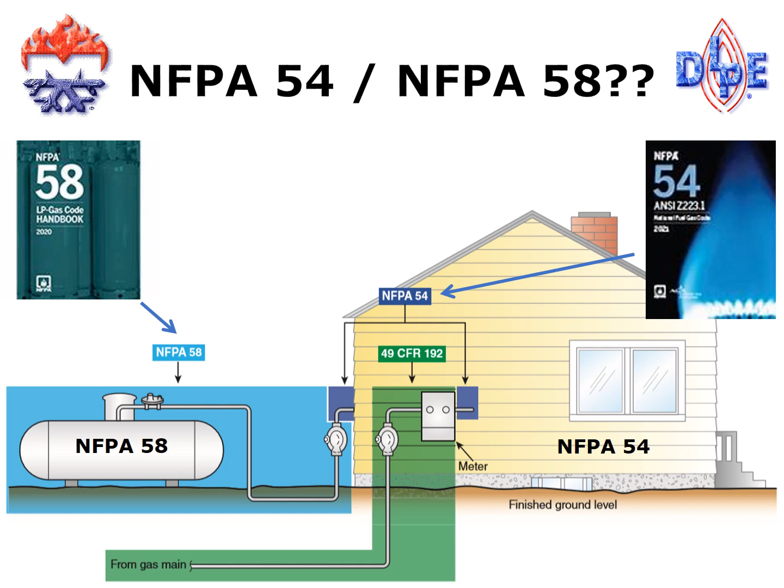It is highly recommended that anyone sizing LP gas installations not only have a RegO L545 LP gas serviceman's manual, but also download the free RegO app on their smartphone. In that RegO app is a copy of the L545 Blue Book, in PDF version. In addition to that, there are regulator sizing calculators and also line sizing calculators.

Quality Steel has a valuable app as well and will help you to calculate vaporization capacities. It gives you container sizing and much more important information.

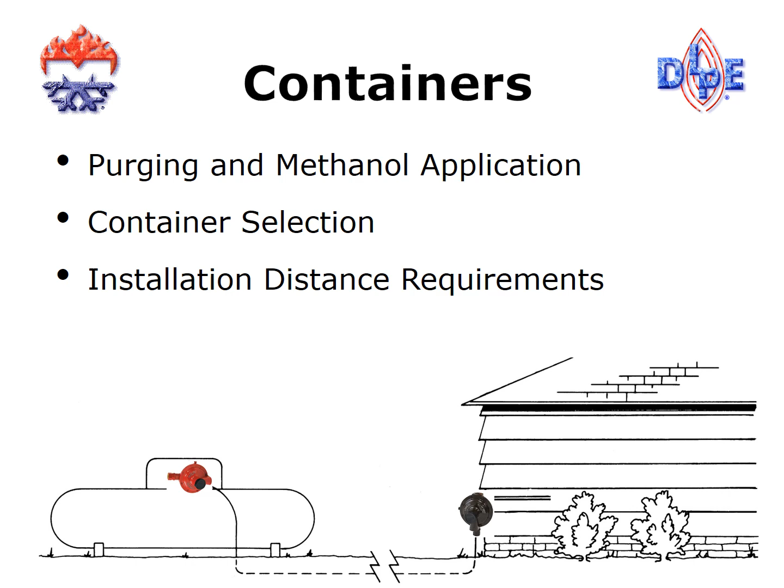Today we will be discussing container purging and methanol application, container selection, and also some installation distance requirement information.

A big part of making sure that we have a successful and efficient propane installation is to make sure that the containers are prepared properly before they're installed. A critical part of that preparation includes purging the containers, or making sure that all of the impurities like nitrogen or air or any sort of inert material are removed from the cylinder or the tank and replaced with propane vapor.

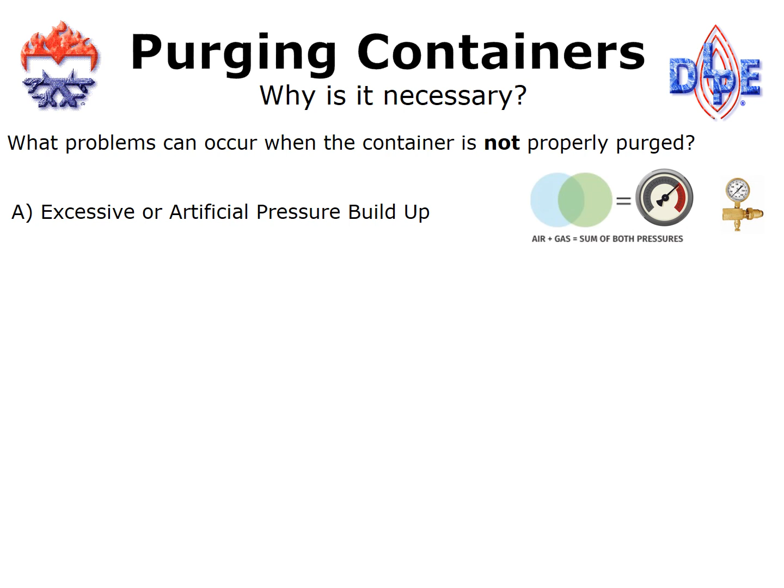This critical part of preparing that tank or those tanks will eliminate any excessive or artificial pressure buildup inside the tank. It will also make sure that we have the correct air and gas mixture to all of the appliances. Additionally, it'll prevent any containers from being filled slowly—it'll speed up that delivery process.

Because of the lower pressure inside the container, it will also reduce the potential for any tanks connected to the contaminated cylinder from being contaminated or affected by transferring that product from one container to the other.

It's important to point out that while we're talking about the importance of purging containers—getting all of those impurities or contaminants out—that most all new containers, and even containers that have been professionally recertified or refurbished, are shipped from the facility that they were built or repaired.

They're shipped with a vacuum purge already on them. So many of the steps we're going to be talking about over the next few slides do not pertain necessarily to new containers. However, there is a chance, and we'll get into this a little bit later in the presentation, that even those newer tanks will lose that vacuum purge over time, whether it's through shipping or whatever. So the ability to repurge that container, the ability to know how to do that, is very important.

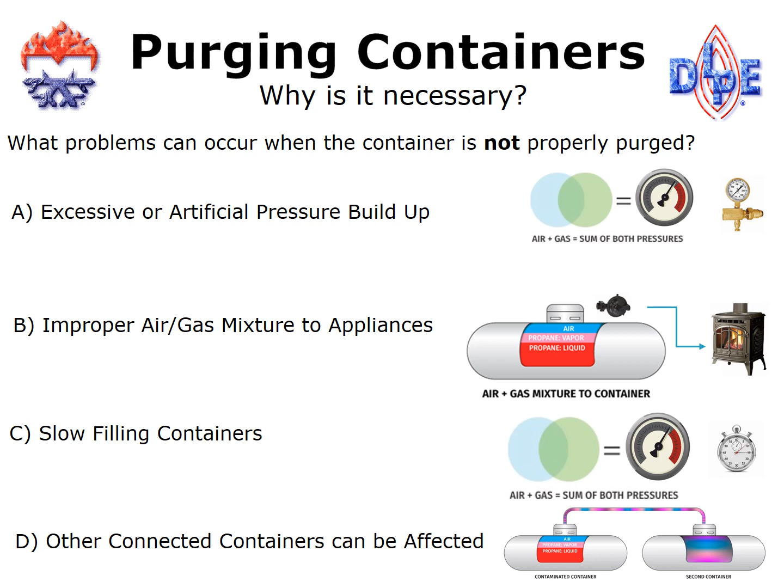I mentioned excessive pressure buildup can occur. Well, consider the fact that propane on any given day, depending on the outdoor temperature, can be at a varying pressure. The warmer it is outside, the higher the pressure is inside the container.

For example, on a 100-degree day, the approximate vapor pressure inside of that container is almost 200 pounds. Well, if you consider the fact that atmosphere, or air at atmospheric pressure, is nearly 15 pounds, it's easy to see that combining those two pressures—atmosphere and also whatever the pressure of the propane itself is inside the container—can result in an unsafe working pressure.

It's also important to make sure that we have all of the air or inert gas out of that container before propane is introduced into it, because we want to make sure that we have a proper air mixture to all of the appliances. Propane appliances are designed and built at the factory to mix the air in with the propane vapor at the actual burner tip or point of combustion. So if we provide that appliance with a product that already has air in it, it will result in a burner flame or burner tip lifting or becoming too lean to burn properly.

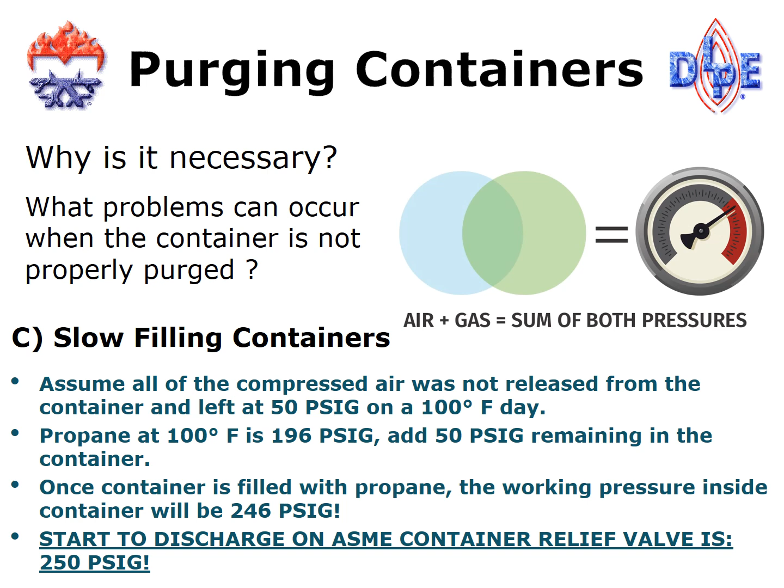And of course, when we have a multiple container installation and one of those containers was not properly purged and possibly has some impurities in it, when those containers are connected together, those impurities will transfer or migrate from one tank to the other, which will now create a situation where we have multiple tanks that are improperly purged.

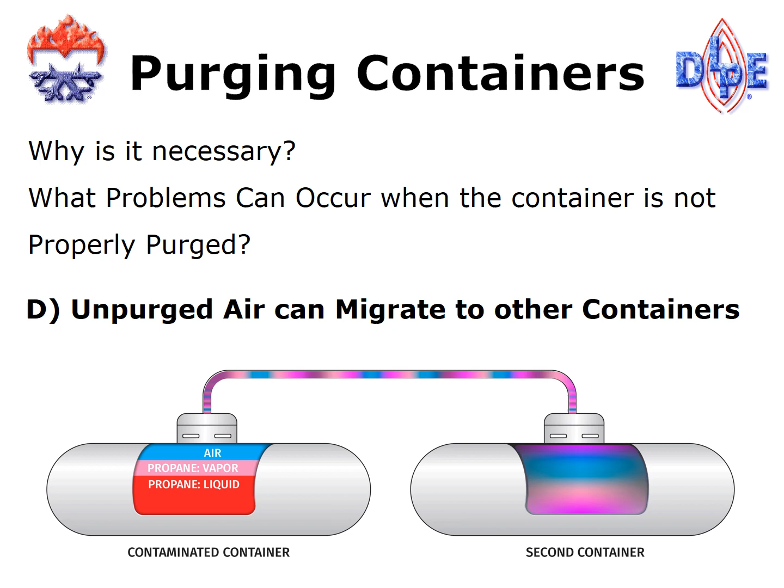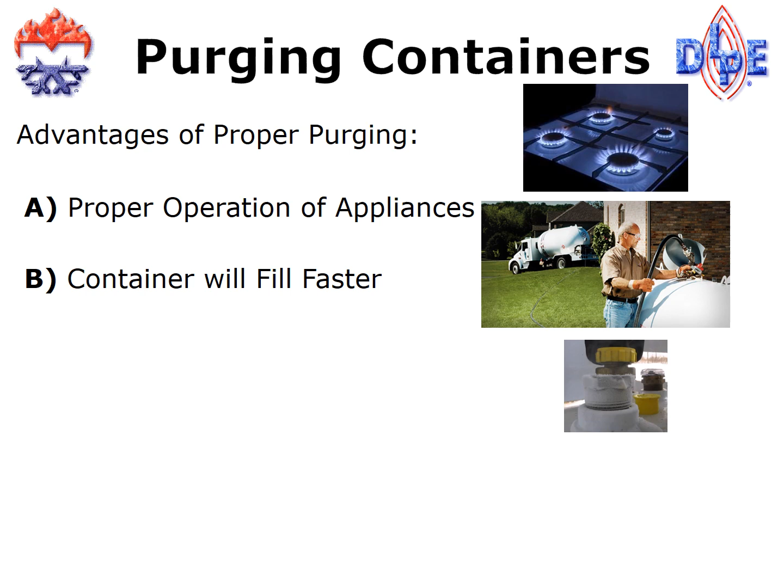So just like that, with the proper purging of propane containers, you'll make sure that the appliances are operating properly. You'll make sure that the containers are filling faster. You'll reduce the risk of a premature pressure relief valve discharge. And you'll also eliminate the transfer of air or impurities from one container to the other. And once this system is running efficiently and at peak performance, you're going to have happy customers as well.

If a container's been open to atmosphere, there's a high likelihood that some impurities have entered the cylinder or tank. Sometimes what happens is a cylinder will be left open. It will allow atmospheric pressure to enter inside the container, and then either the cylinder is simply left open, or someone realizes the tank has been left open and turns it off.

In those cases, sometimes the pressure will actually build back up. The point is, if a cylinder or tank has been open to the atmosphere for any length of time, it's important to release the contaminated product inside the container to atmosphere and then begin a conventional purging process. Always make sure that any release of impurities or propane into the atmosphere is done in a safe, controlled manner in an approved location, such as a bulk plant or other approved location for this process.

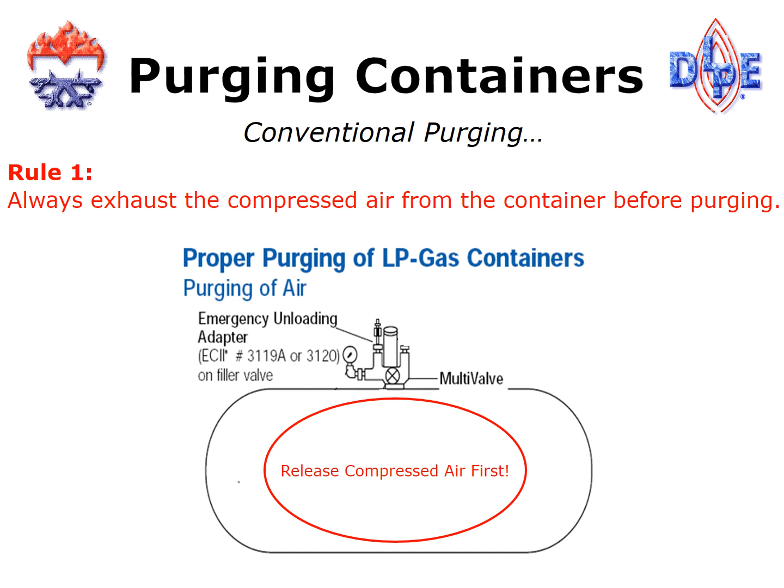It's important that when we perform a conventional container purge, we always use propane vapor. We never want to use liquid propane. When liquid propane is used, as little as 50% of the air will be removed from a container during the process.

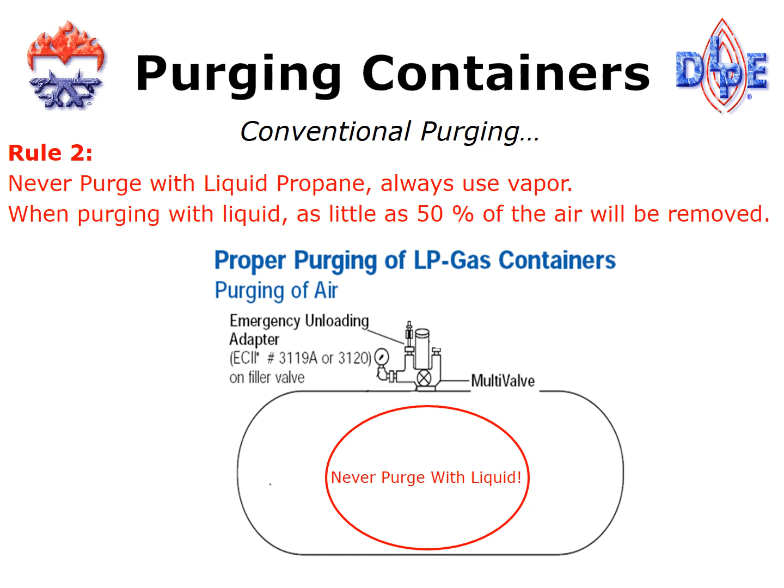The purging process is pretty straightforward. Again, using only propane vapor, we want to introduce approximately 15 psi into the container approximately 4 to 5 times. In other words, we want to introduce the 15 psi, which basically is equal to 1 atmosphere, and we want to do that again 4 to 5 times. Each time we do this, we want to exhaust that 15 psi out into the atmosphere before the second 15 psi is introduced into the container.

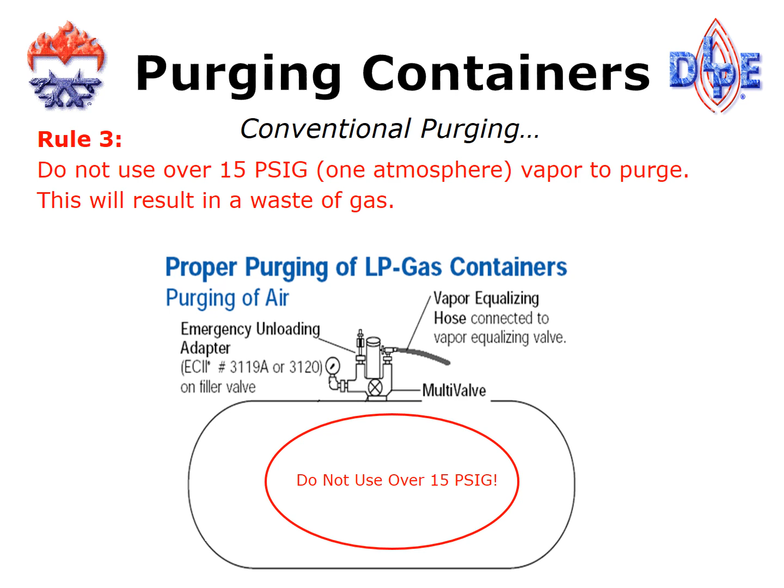Probably the best way to do this is with an unloading adapter. We would take the unloading adapter and install it on the filler valve to open up the back check. Then we would take a 0 to 300 pound pressure gauge and install it through the POL connection on the service valve or multi-valve. Third, we would attach a vapor line to the container and pressurize the container from another source up to 15 psi, which again equals 1 atmosphere. The vapor would be introduced into the container through the 1.25 inch Acme connection on the vapor equalization connection.

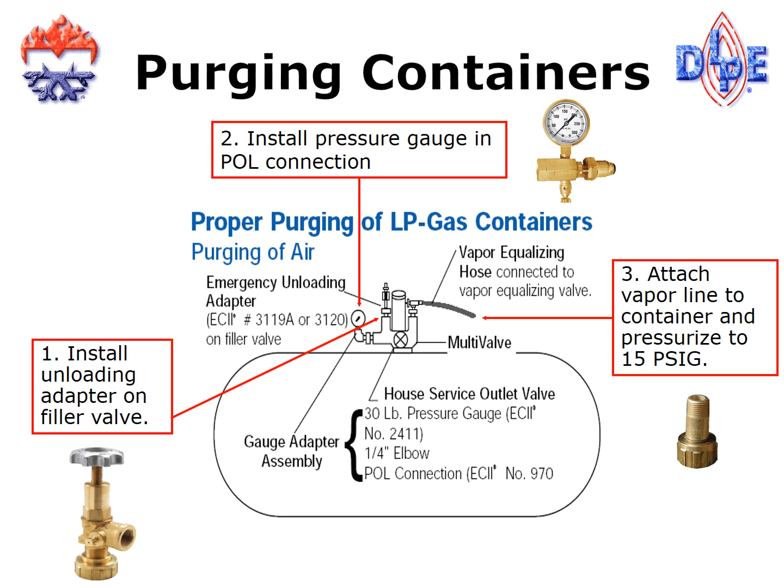The next step would be to close the vapor inlet hose on the vapor equalization valve, then vent the air and gas mixture to the atmosphere. And again, remember, this is something we're going to be doing 4 to 5 times. Incidentally, the product will be released to the atmosphere through the unloading adapter connection at the fill valve.

After this procedure is done 4 to 5 times, the remaining or residual air left in the container is somewhere between 3 and 6%.

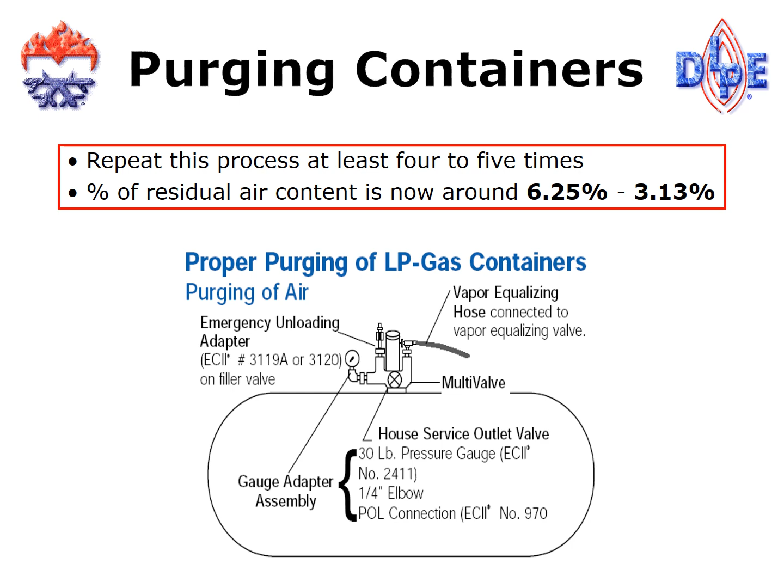Here's basically what happens when a conventional purge is done. After the first 15 psi purge, approximately 50% of the product remaining in the container is air. After the fourth introduction of 15 psi vapor, approximately 6% of the remaining product in the container is air. If you look at the chart on page 12 of the RegO Blue Book, the L545, you'll see that every time a purge is done, it cuts the remaining air inside the container down by approximately half. The first purge left 50% air remaining, the second left 25%, the third left 12.5%, and so on.

Another thing to point out is how much product is used. Again, this is generally more of an old school method to purge tanks, but there are some instances, even today, where this is required. If a 1,000-gallon tank is purged properly, it'll consume approximately 18 gallons of propane to get that container properly purged.

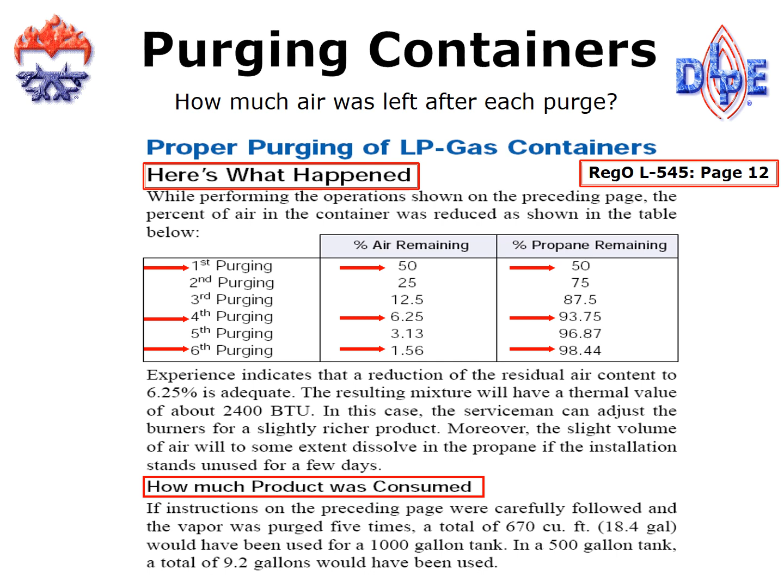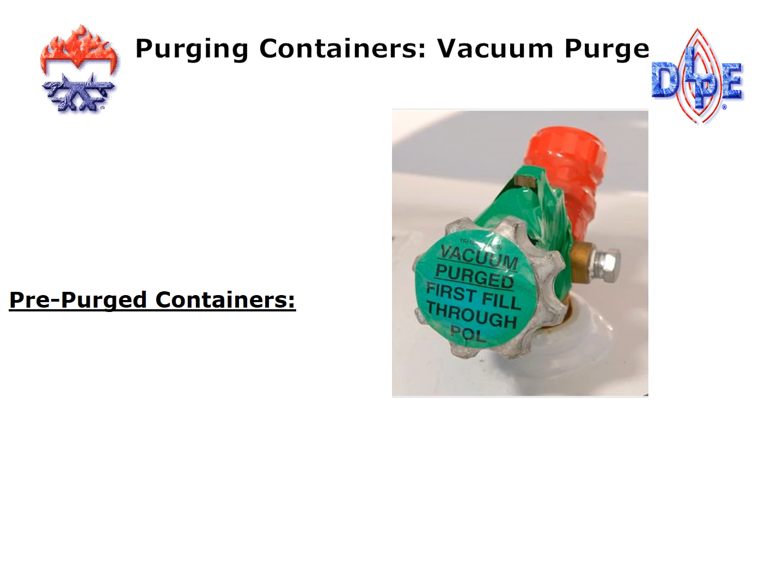As I mentioned earlier, modern tanks all come from the factory with a negative pressure or vacuum purge on them. They're all considered pre-purged containers from the manufacturer. A vacuum pump is used to draw down or reduce the atmospheric pressure inside the container from 1 atmosphere, about 15 psi, to minus 27 inches of mercury. Another thing I mentioned earlier was to never remove the shrink wrap or the decals from any of the fittings on a vacuum purged container.

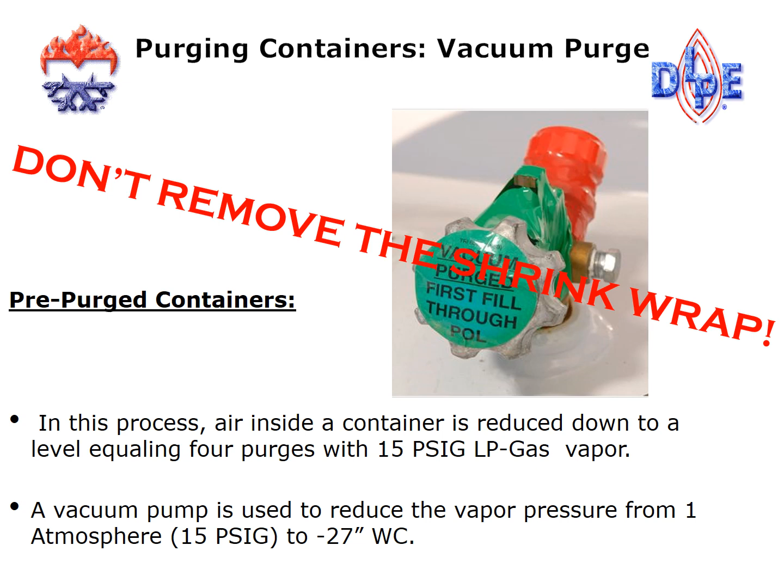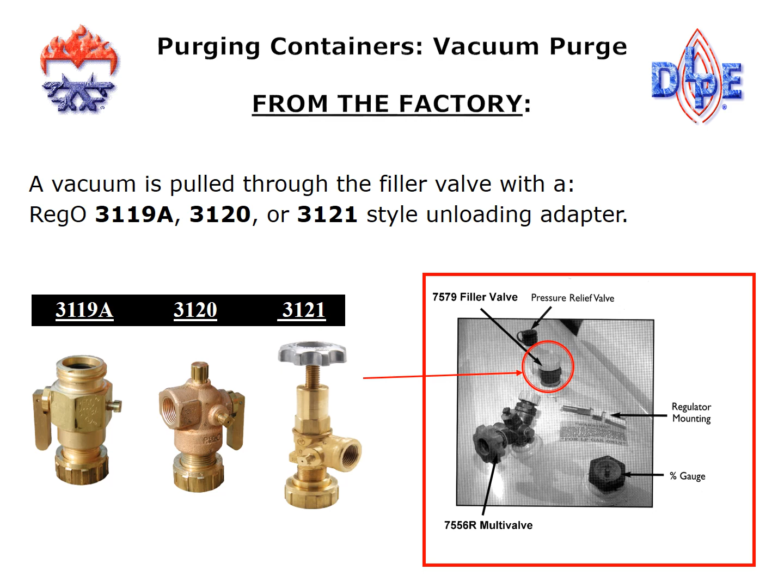It's a pretty simple process. The manufacturer pulls a vacuum on the container by putting an unloading adapter on the fill valve. Approximately halfway through drawing the vacuum or initializing the purge on that tank, the valve is shut off, the fill adapter is removed from the fill valve, and the remaining portion of the vacuum or drawdown is pulled through the POL connection on the multivalve.

This is done because if all of the vacuum was pulled through the fill valve, the issue would be upon removing the fill valve adapter from the fill valve. If the negative vapor pressure on the container were at full capacity, minus 27 inches water column, both checks inside the fill valve would be drawn open to pull atmosphere into the container, which is what we're trying to avoid. By pulling half down through the fill valve, we're doing it in an efficient manner and then finishing up that vacuum purge through the POL connection. Doing so will allow us to control with the service valve how much product passes into or out of that valve.

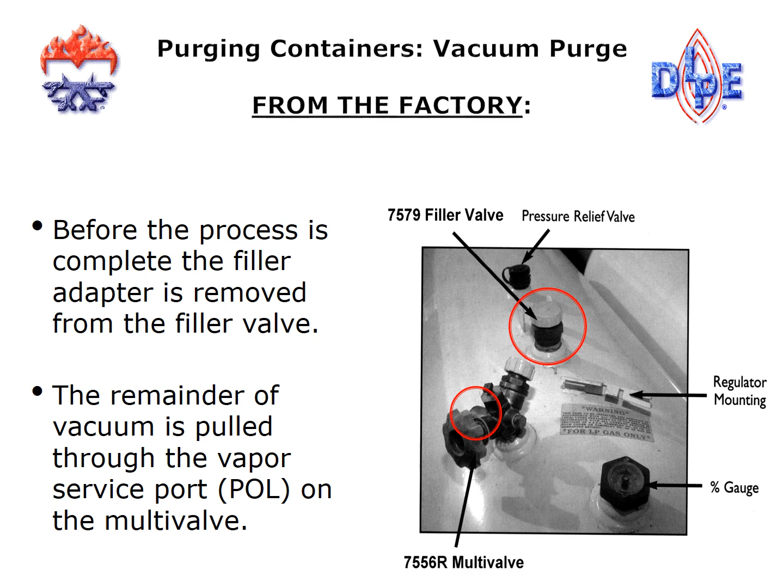With most all new containers being shipped from the manufacturer with a vacuum purge on them, and also reconditioned or refurbished containers being shipped from the refurbishing facility with vacuum purges on them, it's important to point out the 3 basic steps or rules that we suggest be followed to make sure that vacuum is not lost before placing those containers into service.

When receiving pre-purged containers, rule number 1 would be to carefully remove the plastic shrink wrap and any stickers or decals placed on the fill valve and also the multivalve from the factory. Additionally, the 1¼ Acme cap and the 3/4 Acme cap must remain tight and not be removed. The service valve and the spitter valve also must remain tight and not be opened up. Failing to do any of these steps may result in the vacuum purge on the container being lost.

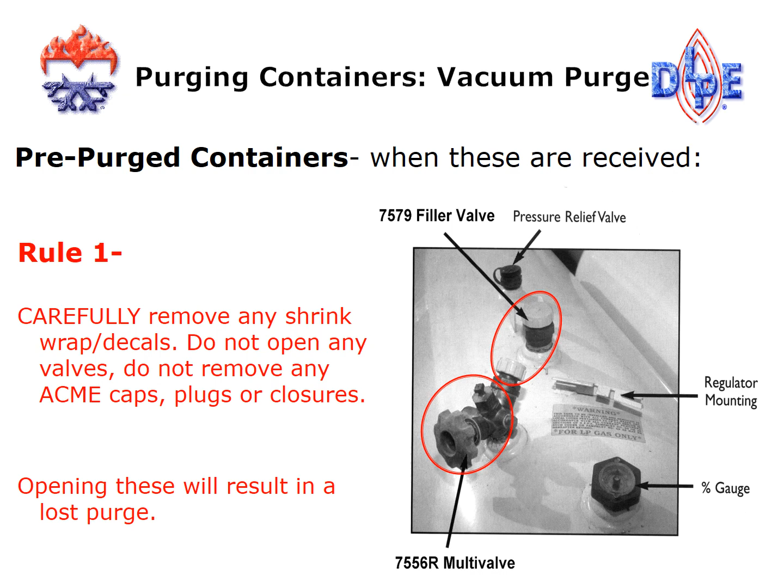So what happens if a vacuum purge container is received, but it's lost its vacuum, lost its purge? Well, in that case, that tank or container must be purged the conventional way. Basically, this means introducing 15 psi of propane vapor into the container and then releasing it into the atmosphere. This is required to be done 4 to 5 times to remove any residual impurities or air from the container and place it into the atmosphere.

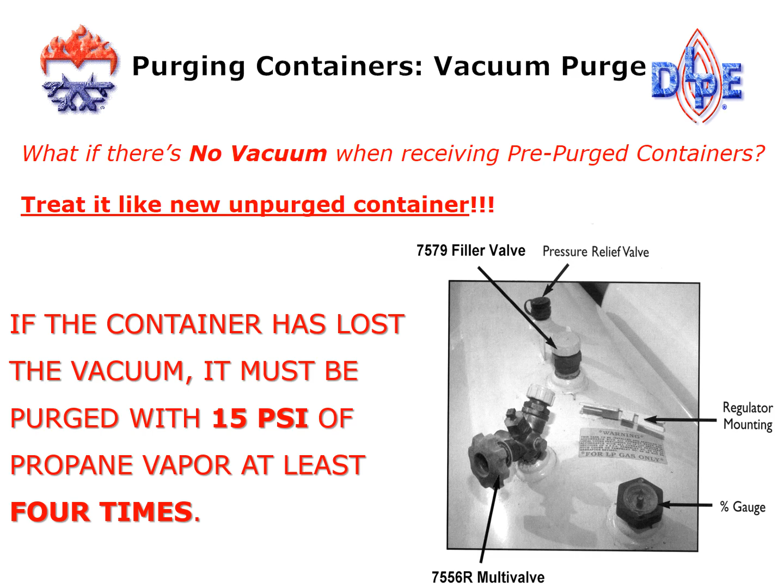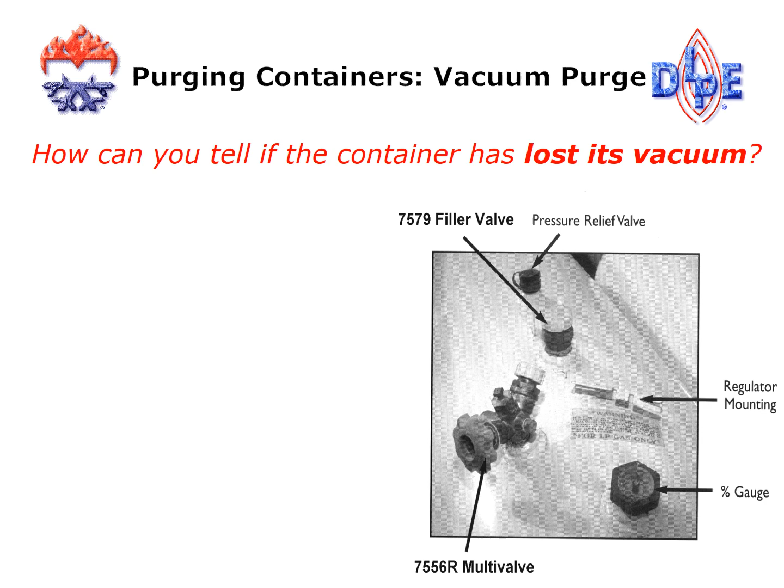It's often asked, how can you tell if the container has lost its vacuum purge? Well, you can tell because at the beginning of the next step, which is rule 2, it's required to introduce methanol into the container. We do that by using the vacuum on the tank to draw that methanol in to treat the inside of that tank properly for moisture. If the container does not draw the methanol into it, using the method we're going to speak about in a few moments, then that's a good indication that container has lost its vacuum purge.

It's important to point out that the number of containers that lose their vacuum purge between the time they leave the manufacturing facility and the time they're prepared for service, prepared to go out into the field, is very small. But it's worth noting what the proper procedures would be if that does take place.

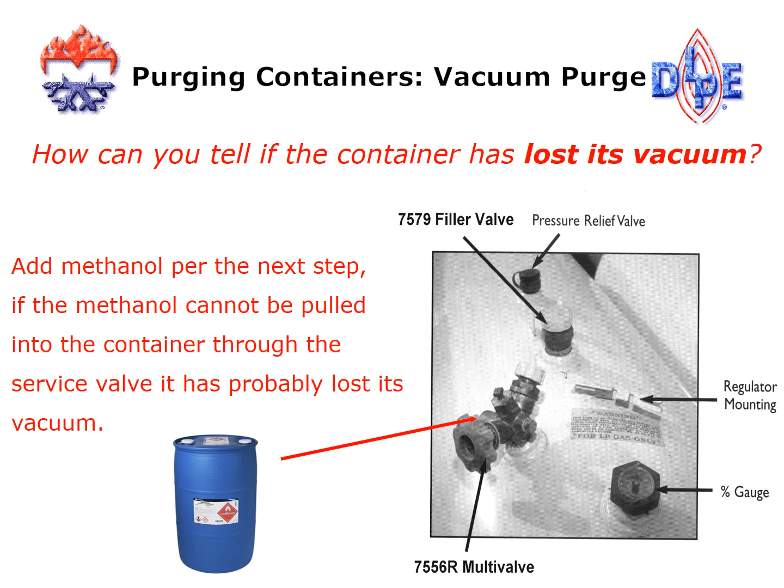Rule number 2 is to begin to introduce methanol into the container. On page 9 of the RegO L545, or that little blue book, it will detail how much methanol is required to be drawn into or injected into a container of a particular size.

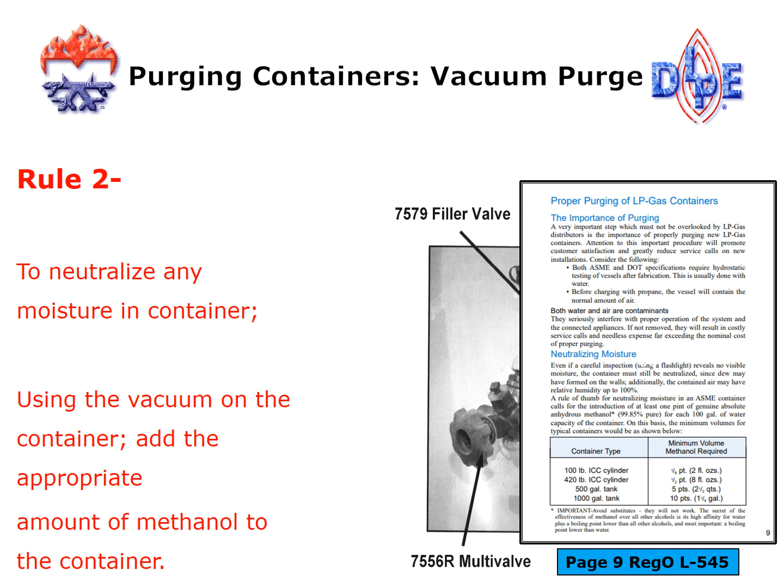If a container has a vacuum purge on it from the manufacturer, a measuring cup is filled with the appropriate amount of methanol. A rubber pigtail is connected to the POL connection on the multivalve and placed into the measuring cup. Then the service valve is opened very slightly, which will draw the methanol in the measuring cup into the container. It is important to make sure that service valve is turned off before drawing any atmosphere or surrounding air back into the cylinder or container.

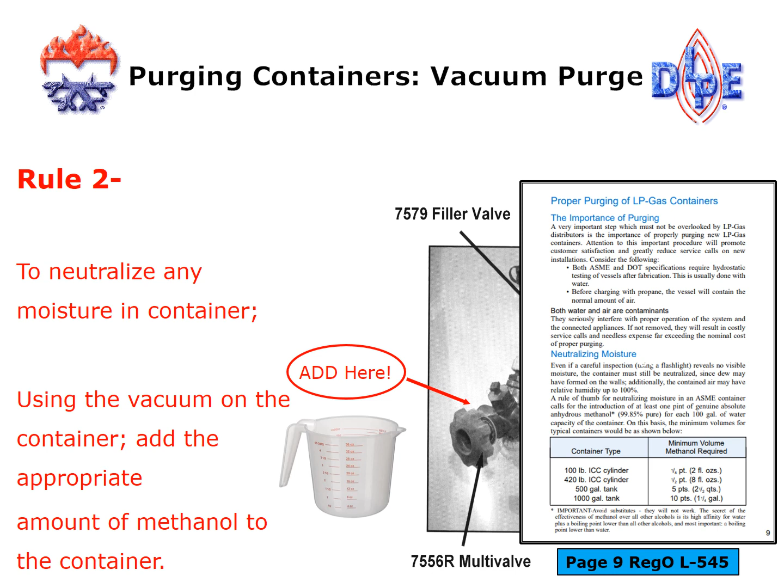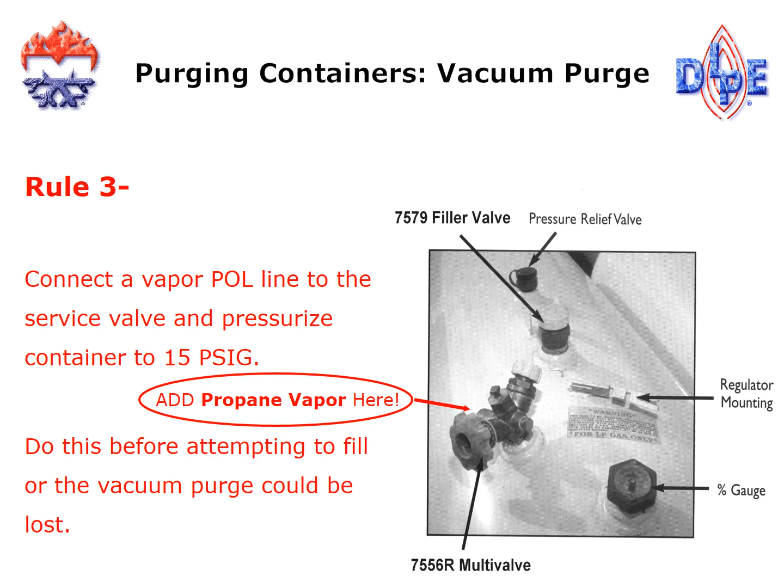Two reasons why it's so important to introduce methanol into a new container: over time, if water or moisture remains inside or on the inside walls of a container, it will lead to rust or oxides. It has been proven and well debated over several decades that rust or oxides may affect the strength of the ethyl mercaptan that's injected into the propane at the terminal. So we want to prevent odor fade or any potential causes of odor fade, to minimize the risk of rust or oxides being created inside the container.

Another reason it's so important to neutralize the moisture is because that water in a tank or container will be withdrawn with the vapor into the pigtail, into the inlet nozzle of the regulator, and at certain temperatures or certain BTU demands will cause the orifice built into the inlet nozzle to freeze over. And of course, when that orifice freezes over, it will essentially stop the flow of gas into the regulator.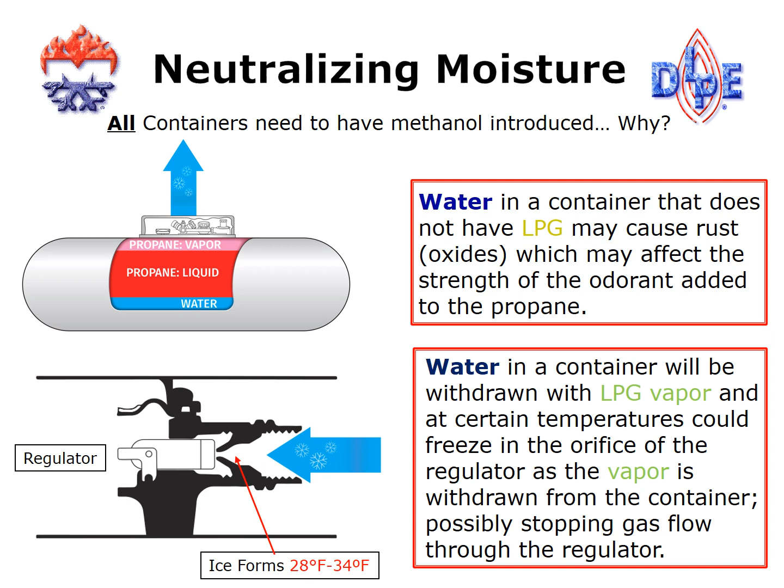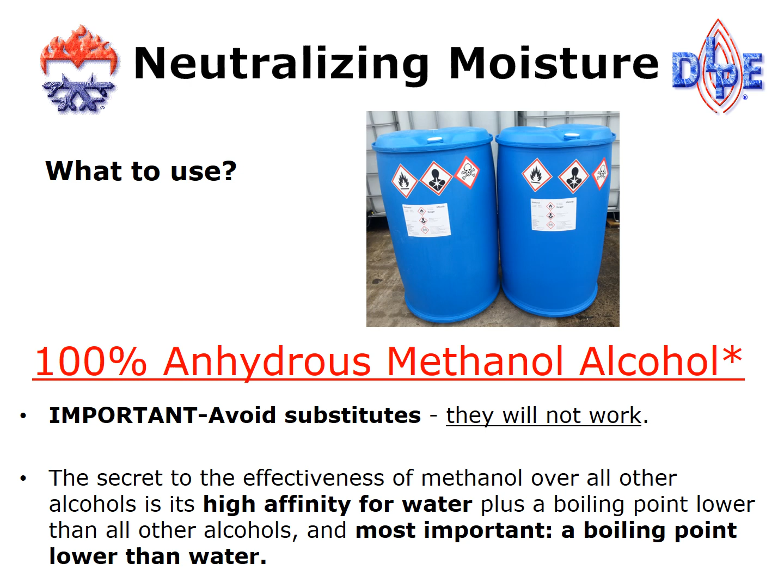Always make sure 100% anhydrous methanol alcohol is used when treating containers. This will work the absolute best. Again, on page 9 of the RegO L545, there is a chart showing the recommended amounts of methanol, or the minimum volume required for introduction into new containers, new tanks or cylinders.

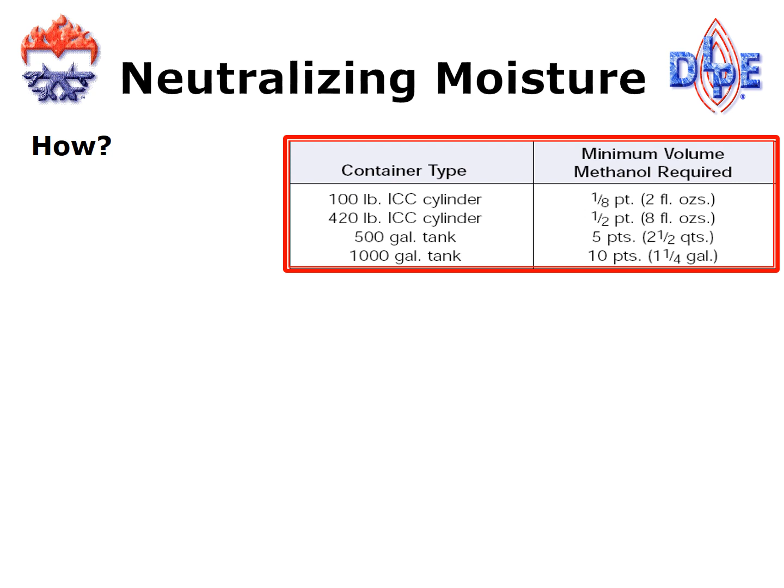What about treating a tank that's already in service? Maybe a tank at a customer's location showing signs of having moisture, but obviously has a positive pressure on it because it's been in service for a number of years. In those cases, you can use a methanol injector, which does basically the same thing as drawing the methanol in with a vacuum, but it forces liquid methanol into the tank with a hand pump through the POL connection on the service valve. Just another way to treat a container that's already in service.

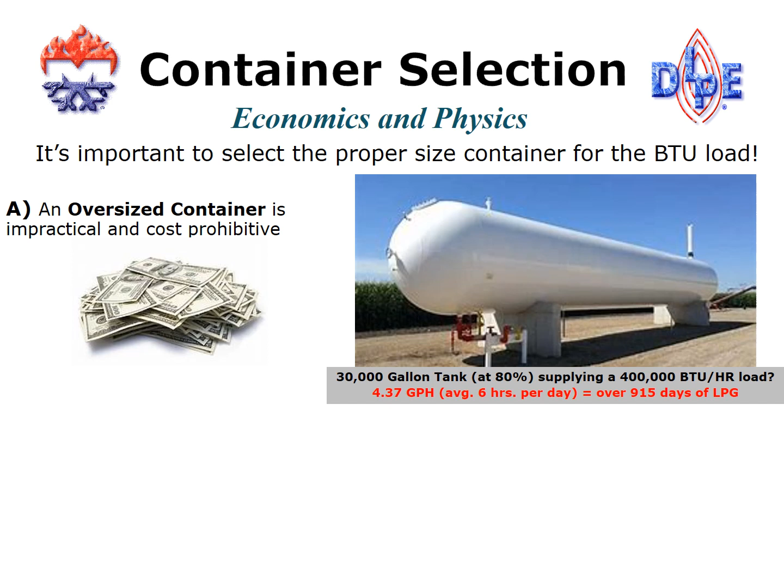Sizing a propane tank is very important. Oversizing a tank will not hurt or affect the performance, but it can be impractical and very costly to do so. Additionally, there may not be enough property or land available for a larger container to be placed on site.

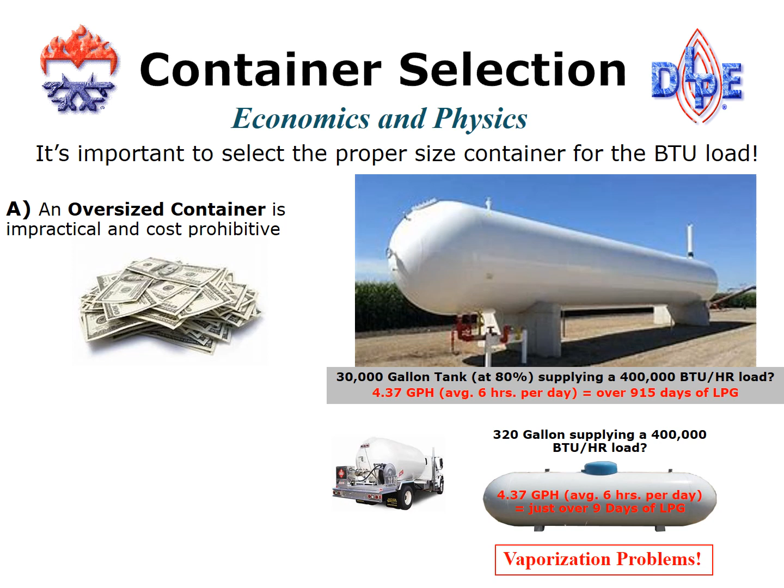The real problem, however, is when a tank is undersized. When you undersize a propane tank for an installation, there are a few things guaranteed. The first is increased delivery costs, because the number of times per year or per quarter that location needs to be topped off is increased. But the most important negative effect of undersizing a container is that it may not vaporize enough BTUs or enough product to support the installation. Going back to the wetted surface inside the tank, the smaller the tank, the less wetted surface where liquid propane touches the sidewalls, which will almost guarantee a vaporization problem.

Remember, the wetted surface, or the area where the liquid propane is touching the sides of the tank inside, will result in the tank's ability to efficiently vaporize that liquid. The more wetted surface, the better that tank will vaporize based on the BTU demand that's being placed on it.

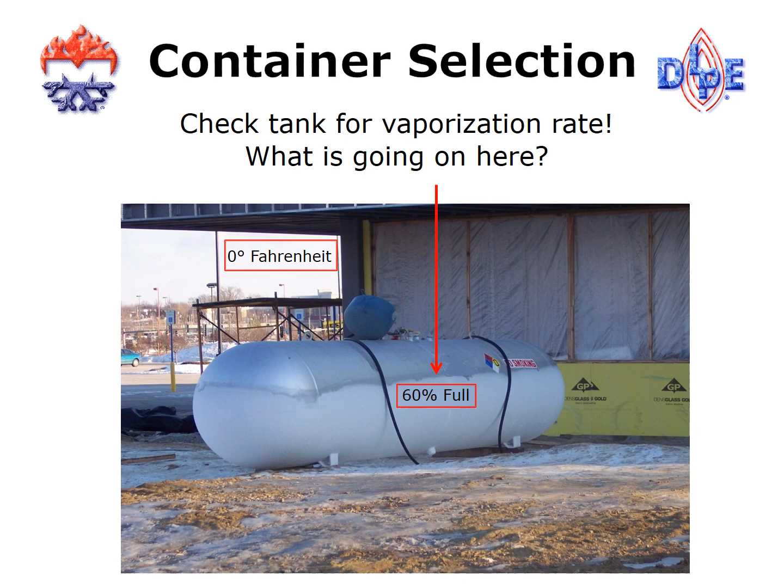Notice that the warmer the temperature is, and the more liquid volume inside the tank, the higher the BTU capacity or vaporization rate of that tank is. There's a direct relationship between the amount of liquid inside the tank, in other words wetted surface, and the outdoor or ambient temperature. The higher the temperature outdoors and the more liquid volume or wetted surface inside the container, the better performance a container will have.

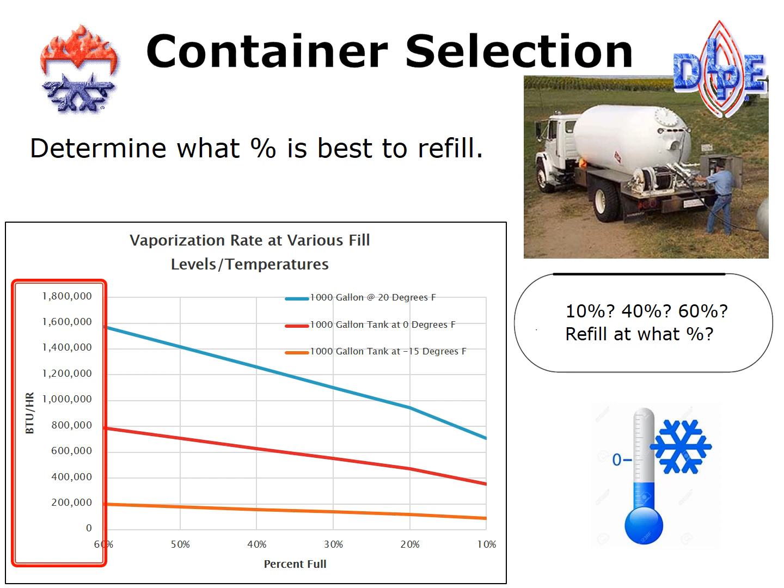Providers also need to determine what size tank is best. Maybe it's a 500 gallon tank, maybe it's a 1,000 gallon tank. Is the customer going to add appliances in the future? Is the tank location difficult to reach in the snow? Is there a bad driveway? All of these things come into play when determining what size tank to set for an installation.

Before we begin our vaporization or tank sizing exercise, I want to point out the three main ingredients to determining proper tank sizing. The first thing we have to figure out is how many BTUs, what is the maximum amount of BTUs this installation will require, and also take into consideration what future appliances the homeowner may decide to add.

Again, what percentage does the propane provider want to go to that location and refill that tank? It's inefficient to go when the tank is at 60 or 70%. But by the same token, you don't want to wait until the tank gets too low and risk that customer running out of product.

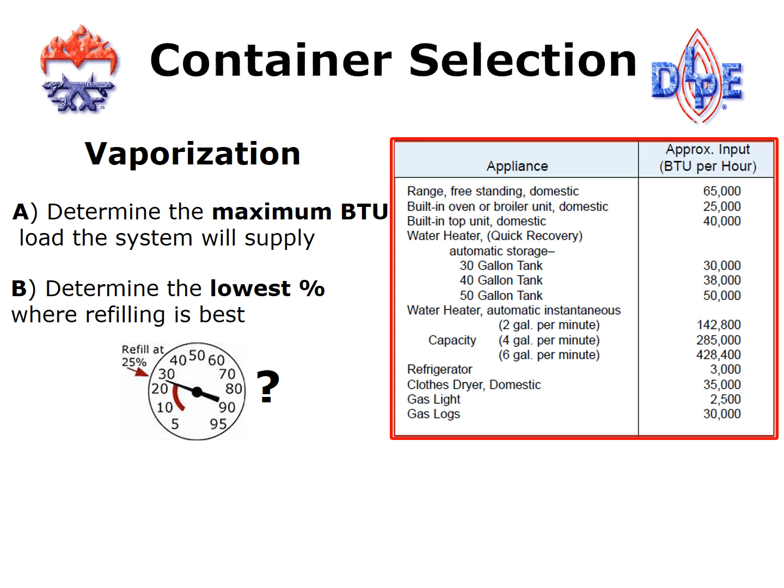The third step is to determine where this tank is located. Is it located in South Florida or is it located in Minnesota? The outdoor temperature, or the coldest outdoor temperature that tank or installation will be subjected to, will also play a large role in determining what size tank to put in or install at that location.

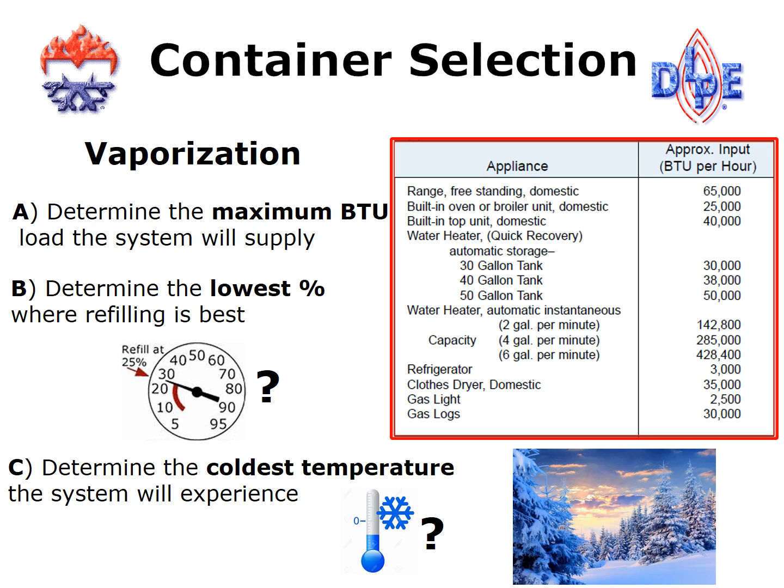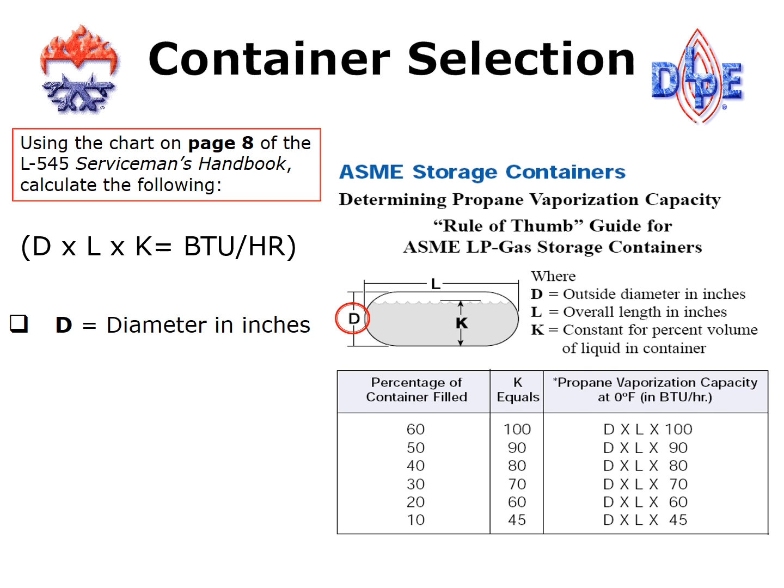So how do we size a large ASME storage container for an installation? It comes down to three measurements: the diameter listed as D, the length listed as L, and K, which is the lowest percentage of liquid that will be in that tank during normal operation.

That percentage would basically be a target before refill. In other words, a tank would not get below, say, 20% or 30%. Each percentage, if you look at that chart on the screen, which is on page 8 of the Rego L-545, shows a multiplier, or K, where it says K equals in the middle of the chart. K is basically representing a multiplier based on what that lowest percentage will be in that container.

Essentially, we're taking D, the diameter of the tank in inches, and L, the length of the tank in inches, and multiplying those two numbers by whatever K represents. In other words, at 20%, the multiplier would be 60. It's also important to point out that on all ASME containers, the diameter and the length in inches are listed on the data plate.

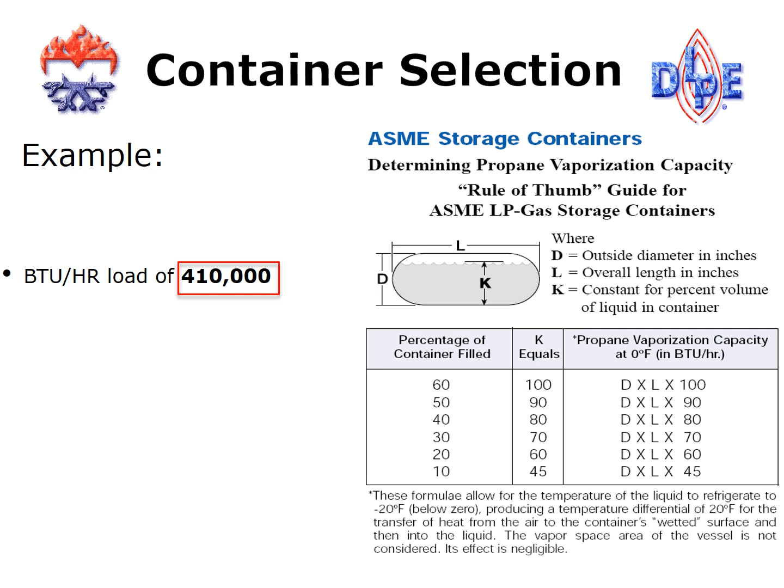Sizing an ASME propane container is pretty straightforward. Let's work through this one installation example. In this particular installation, we have a total BTU demand of 410,000. We have a propane provider that's decided to target refills at 20%, so that's the lowest this tank is anticipated to get. We're also in a region that experiences temperatures as low as 0 degrees Fahrenheit, our coldest expected winter temperature. So with all this information, what size container is required for this job?

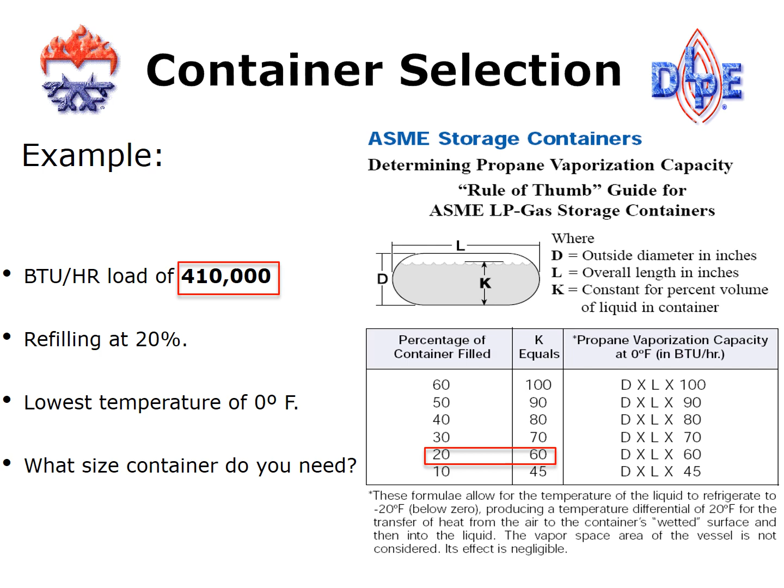The first tank we're going to try to size for this particular job is going to be a 500-gallon above-ground tank. By looking at the data plate, we know that a 500-gallon above-ground tank has a 37-inch diameter and an overall length of 119 inches.

So very simply, we take the diameter of 37 inches times the length of 119 inches times 60, which is, based on the chart, the multiplier for a 20% refill, or the lowest percentage that will ever be in that tank. If we multiply 37 by 119 by 60, we come up with 264,180 BTUs. So the question is, will one 500-gallon container work for this installation? The answer is no. Remember, our overall requirement is 410,000 BTUs, and that doesn't account for any potential future appliances being added to the system.

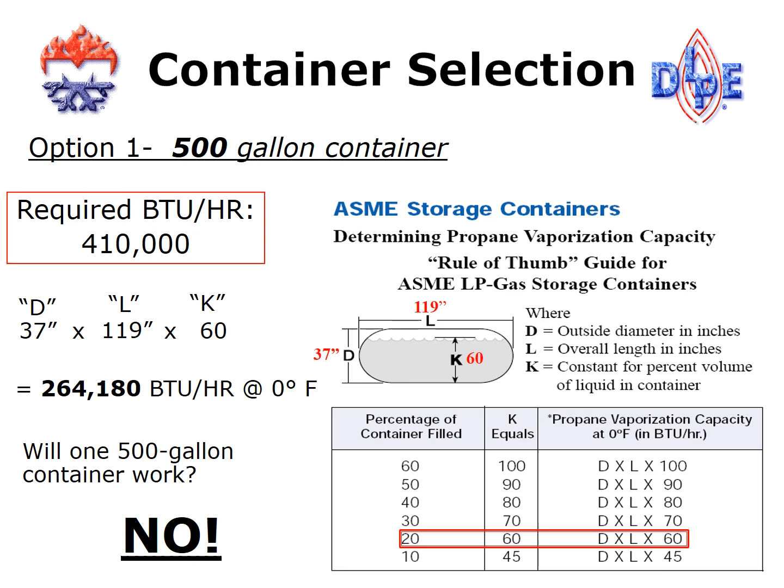So if a 500-gallon above-ground ASME tank won't work, let's try a 1,000-gallon above-ground tank. By looking at the data plate on a 1,000-gallon tank, it tells us that the overall diameter is 41 inches and the overall length is 192 inches. Now we take 41 inches times 192 inches times 60 for the multiplier of 20% as based on the chart, and we come up with 472,320 BTUs. So then the question becomes, will one 1,000-gallon tank work? The answer is yes. 472,000 BTUs exceeds the current BTU requirement.

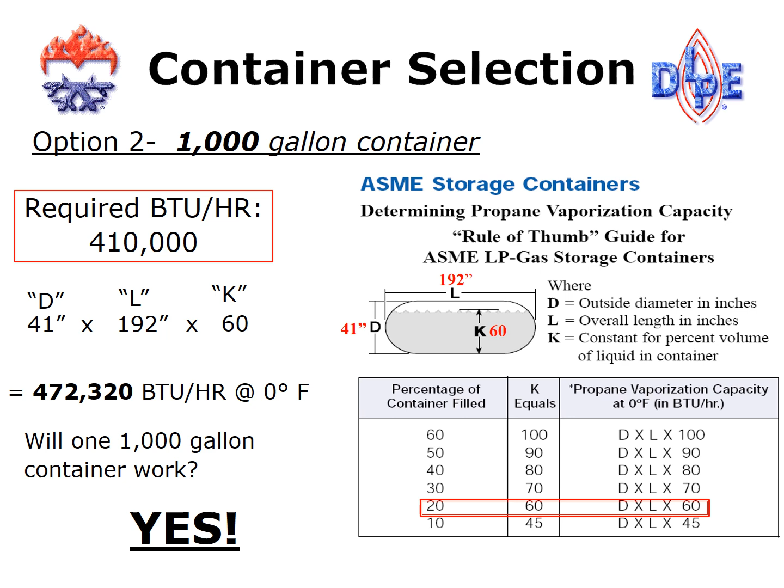As we all know, different parts of the country or different regions experience different coldest winter temperatures. So on page 8 of the Rego L-545, there are also multipliers listed. If the coldest winter temperature your region experiences is minus 15 degrees Fahrenheit, you take that overall calculation we just came up with in the previous slide and multiply it by 0.25, or take 25% of what that calculation was. The calculation we did on the previous slide and the one before that for both the 500 and 1,000-gallon tanks were based at a coldest winter temperature of 0 degrees Fahrenheit. If you're in a region that experiences the coldest temperature of 20 degrees, then you would multiply that overall number by 2.

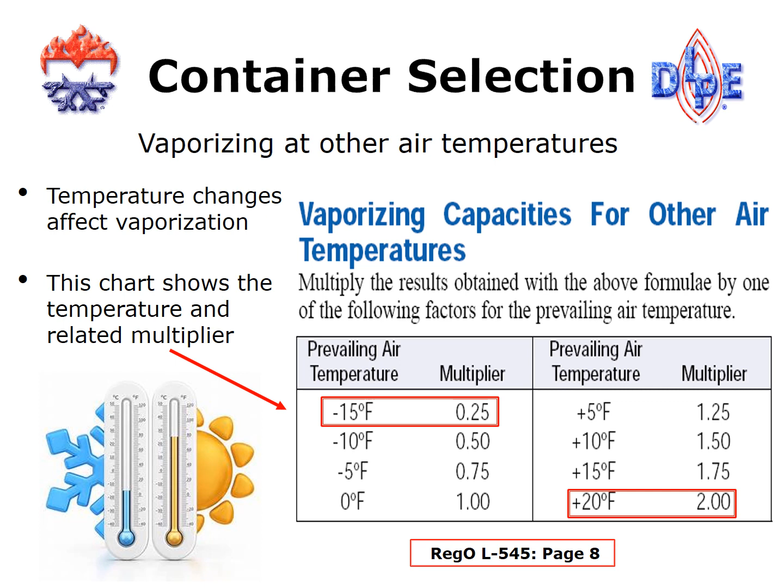To show just how important a role outdoor temperature plays on internal pressure and BTU capacity, here are some examples of the differences of the same 1,000-gallon tank at 20% full. This one example is of that tank at 0 degrees Fahrenheit. Similar to the calculation we just made, it's the same tank. The BTU capacity of this 1,000-gallon tank at 0 degrees, 20% full, is 472,320 BTUs.

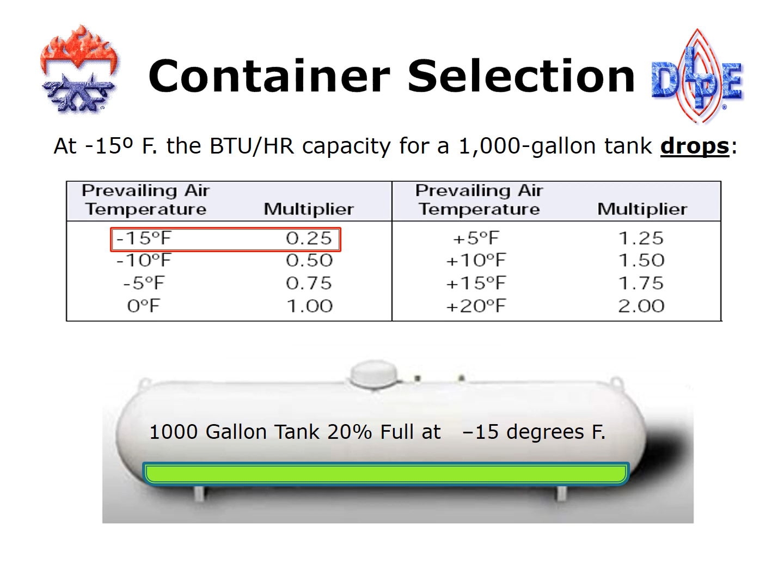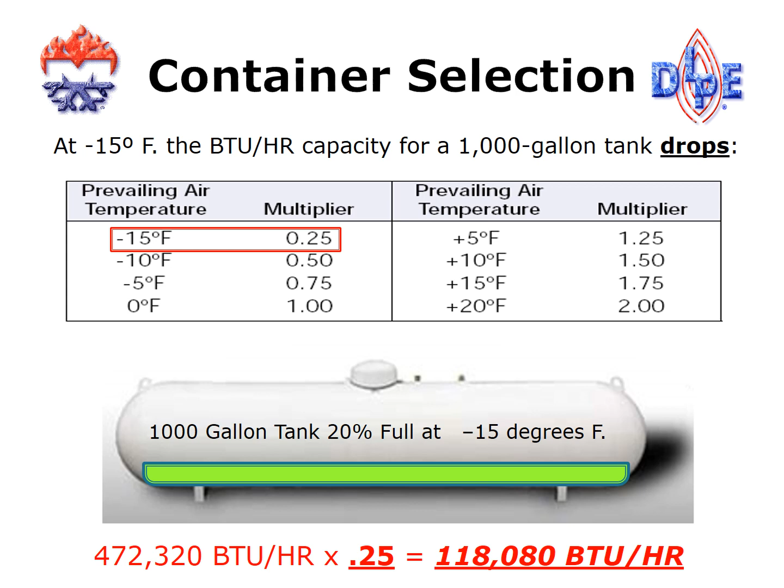If that outdoor temperature drops to minus 15 degrees Fahrenheit, that same tank at 20% full now will only supply a maximum of 118,080 BTUs. But if that tank is at 15 degrees above zero, that same tank is now capable of 826,560 BTUs, and that is with basically a 30-degree temperature swing between minus 15 degrees Fahrenheit and above 15 degrees Fahrenheit. So again, the same tank with different outdoor temperatures: we go from 118,080 BTUs at minus 15 degrees Fahrenheit, to 472,320 BTUs capacity at 0 degrees Fahrenheit, all the way up to 826,560 BTUs at 15 degrees above zero.

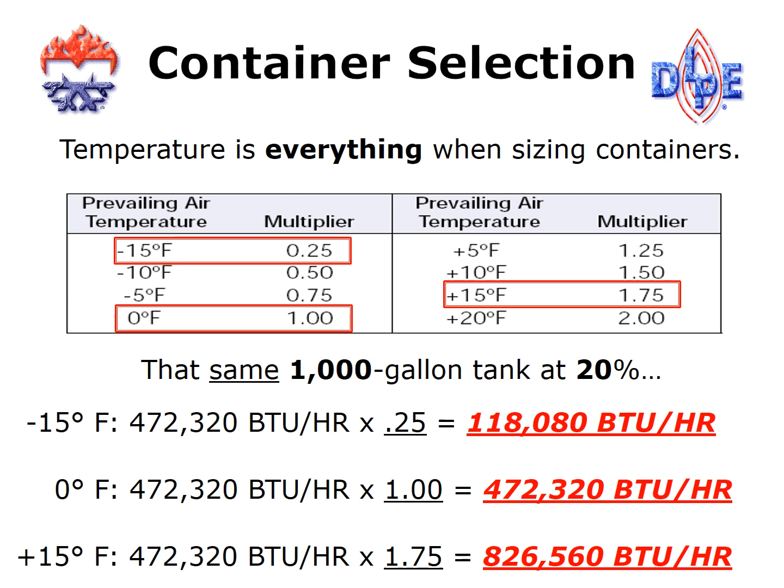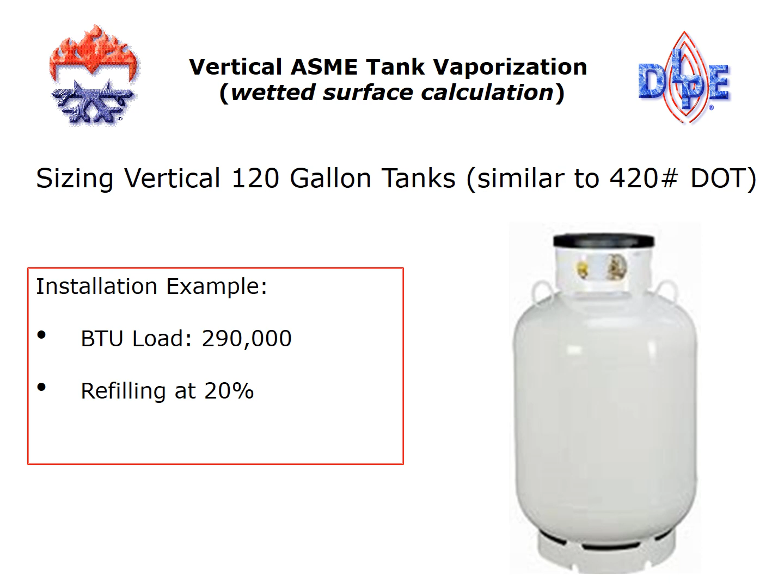The same theory can be applied to vertical containers. In this example, we have a 120-gallon ASME container, which in theory is the same as a 420-pound DOT cylinder in regards to how much liquid volume it will hold at 80%. In this example, we have a total BTU load of 290,000 BTUs. We're again going to target a refill percentage of 20%. And in this region, the coldest winter temperature is -5 degrees Fahrenheit.

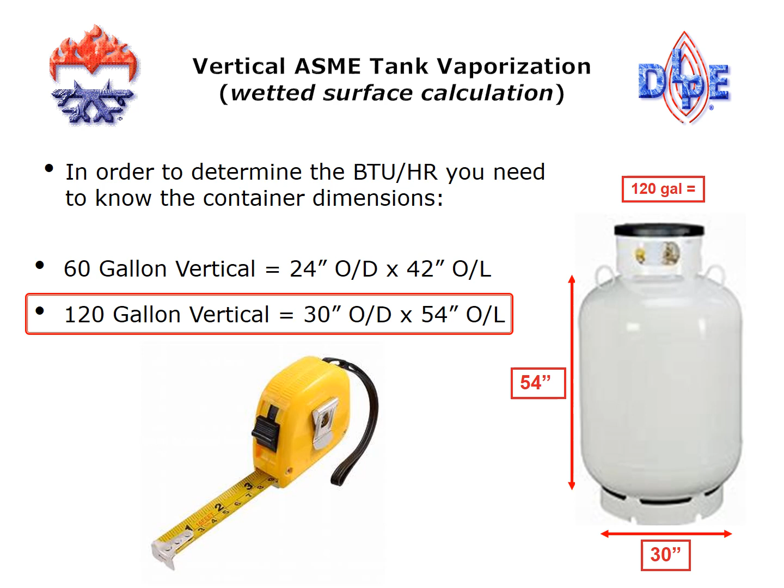A typical 120-gallon vertical ASME tank is 30 inches in outside diameter and 54 inches in overall length, or in this case, height. Given those dimensions, and with the understanding that we're refilling at 20%, we take 30 inches times 54 inches times 60, which again is the multiplier for a refill at 20%. If we multiply all three numbers together, we come up with 97,200 BTUs. Remember, our overall BTU requirement for this installation is 290,000.

So we have a total BTU capacity of this 120-gallon vertical tank at 97,200 BTUs. But remember, that calculation is based on the slide previously, which uses the chart in the RegO L-545 based at 0 degrees Fahrenheit. And remember, I said that this installation experiences coldest winter temperatures of -5 degrees Fahrenheit.

So if you look at the chart, it'll tell you that the multiplier for a -5 degree Fahrenheit coldest winter temperature is 0.75, or basically 75% of what that container would provide at 0 degrees Fahrenheit. So if we take that number and multiply it by 0.75, we come up with 72,900 BTUs for that container.

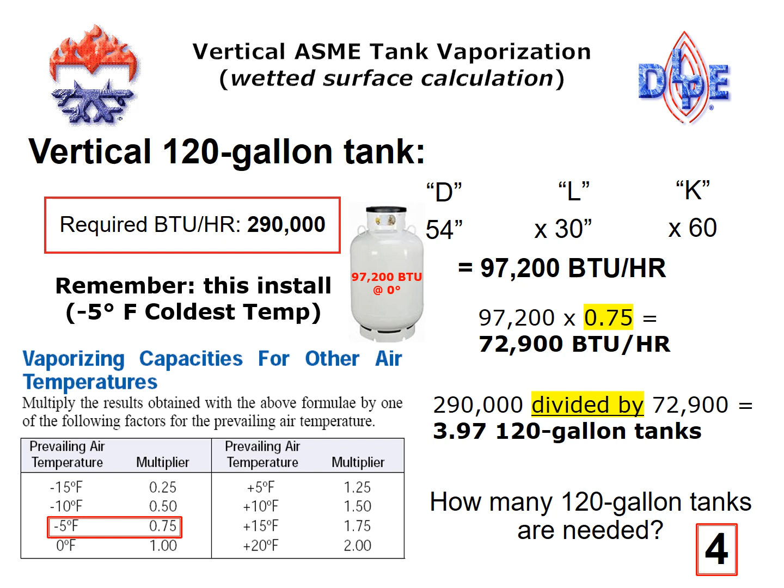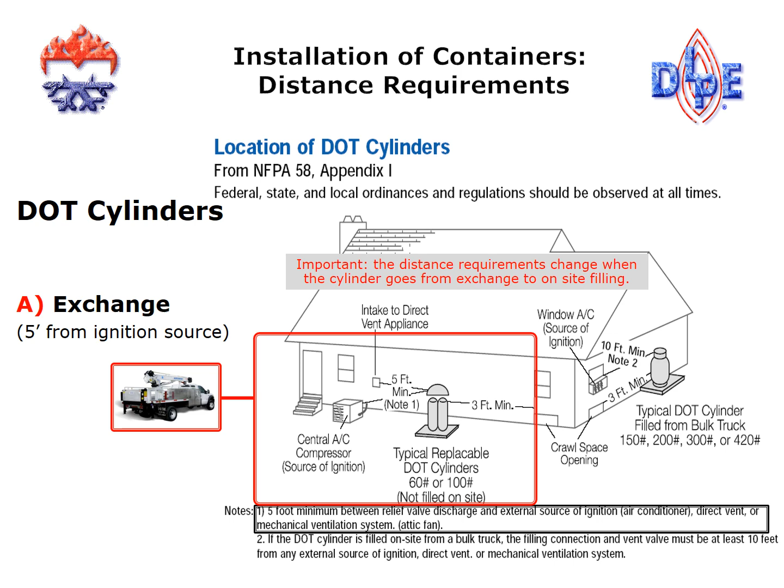Let's take a look at some of the separation requirements of exchange cylinders and also bulk cylinders, or cylinders that are filled on site from a delivery truck or a bobtail. Please note that tanks filled from a truck on site are required to be further away from external sources of ignition than exchange cylinders, or cylinders that you would normally swap out, for example at a hunting cabin or something like that.

The reason for this is because when tanks are filled on site, product is released, even if it's a small amount, into the atmosphere. Therefore the code, NFPA 58, requires any container filled on site, in this example a DOT cylinder, to be a minimum of 10 feet away from a source of ignition. Exchange cylinders, on the other hand, are allowed to be within 5 feet of an external source of ignition because there is no product release to the atmosphere when that cylinder is exchanged.

This information, or these illustrations, are listed in NFPA 58 and also in the RegO L-545 Serviceman's Manual.

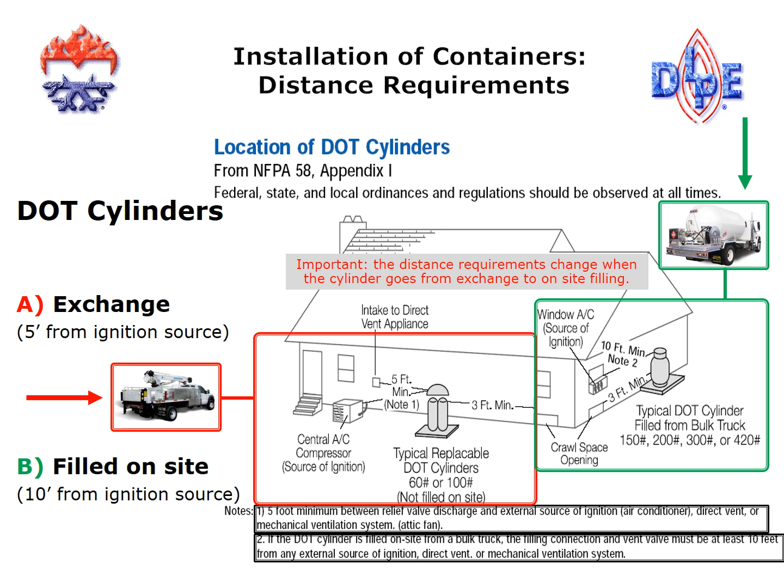Basically, what the code states is that if those groupings of containers are separated by a distance of 10 feet or greater, those groupings of cylinders can go directly next to the building.

However, if you're in a situation where you cannot achieve a minimum of 10 feet separation between each grouping, and let's say the farthest away you can get between each grouping of four 120-gallon tanks is 8 feet, then each grouping of containers at that point is required to be set off of the building a minimum of 25 feet. So we go from allowing the groupings directly up next to the building to requiring a 25-foot separation if those groupings cannot achieve a minimum 10-foot separation between the two.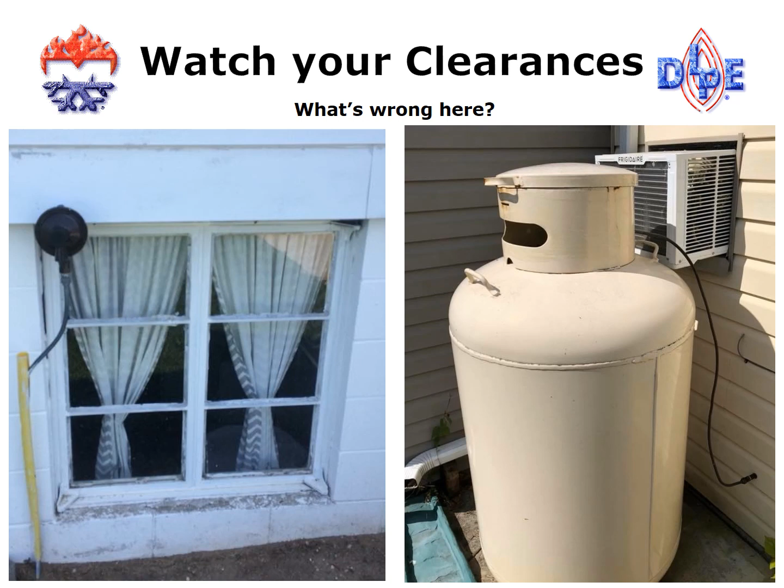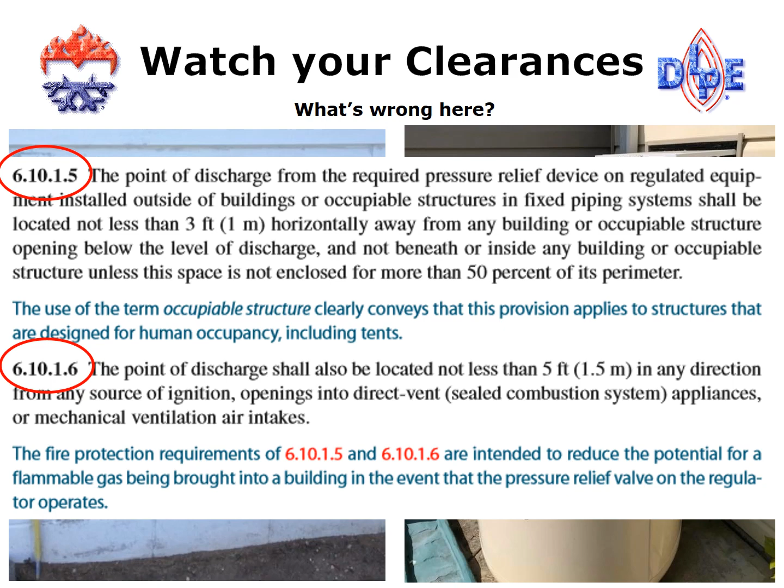So there's always something to take out of the code handbook. When you are reviewing separation requirements or something similar, I often recommend getting the handbook version of that particular code book, not only because it explains the actual code, but it explains why that code came about, some of the history behind it, and a more in-depth explanation as to how that code originated.

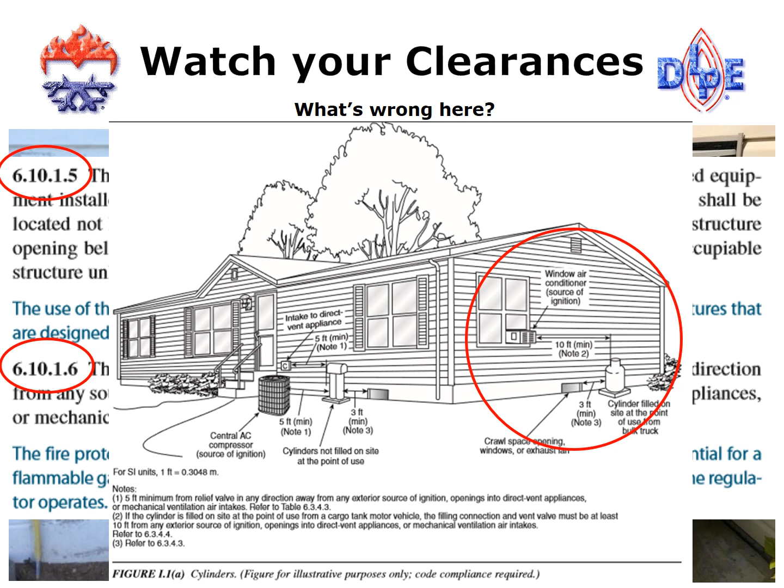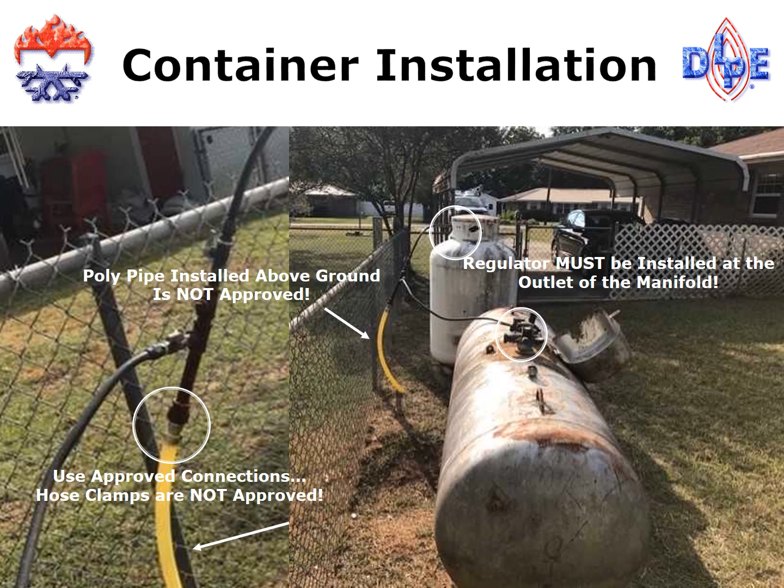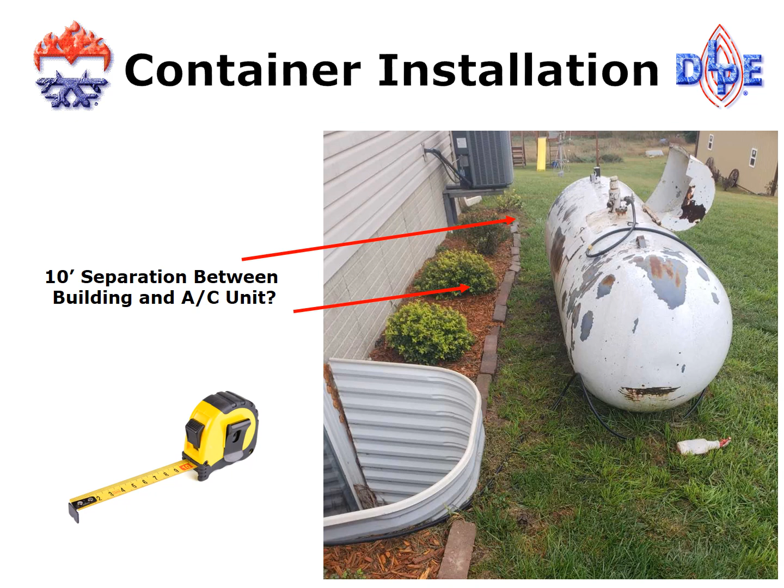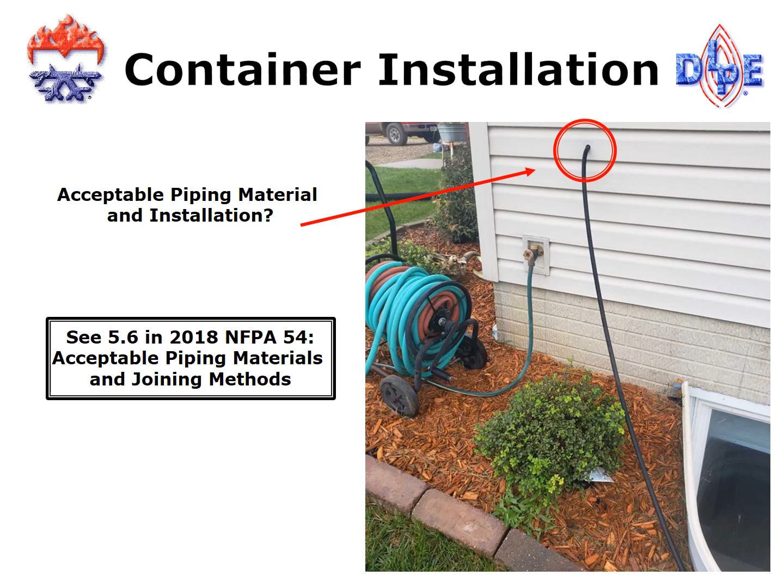Make sure to check out NFPA 54 for acceptable piping materials and joining methods. Also available in NFPA 58 and also the Rego L545 are ASME separation illustrations. In other words, both underground ASME containers and above ground ASME containers, and what their applicable distance requirements are.

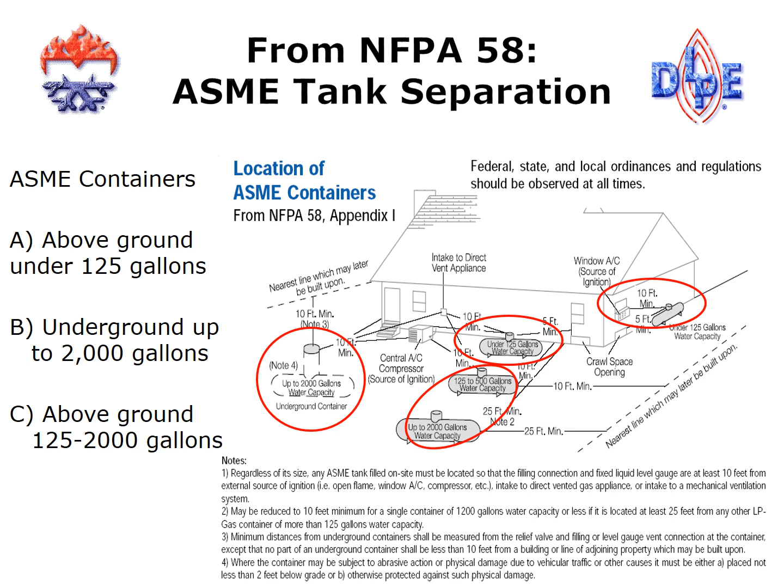For years, there's been some confusion as to what an important building is. NFPA 58 often refers to an important building and what container separation requirements are from an important building. In the 2020 edition of NFPA 58, an important building was defined as a building that is considered not expendable in an exposure fire. For more information on what designates an important building in your area or region, reach out to your local authority having jurisdiction for clarification.

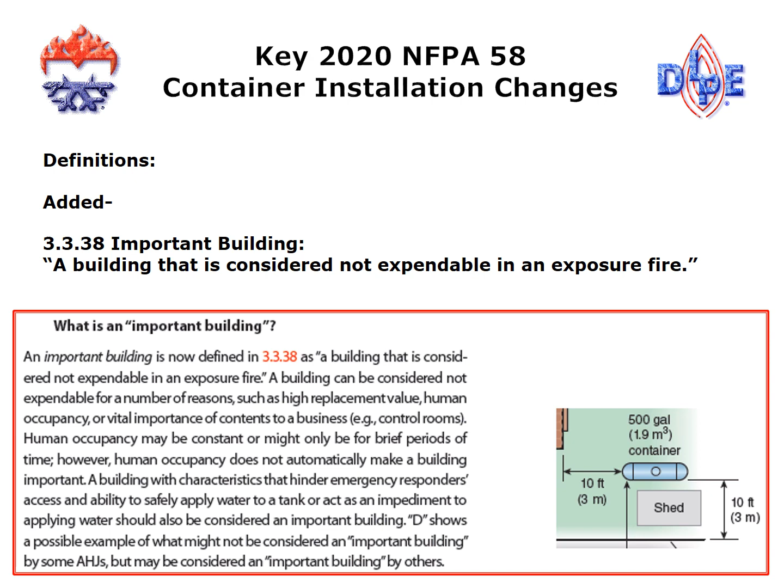Are you aware that above ground ASME tanks are required to be on non-combustible supports if installed in permanent installations, whether that's masonry or another material? Always refer back to your local authority having jurisdiction for more clarification on this. Again, this is ASME containers above ground horizontal installed in permanent installations. It's equally important to note that containers should not be placed directly on the soil.

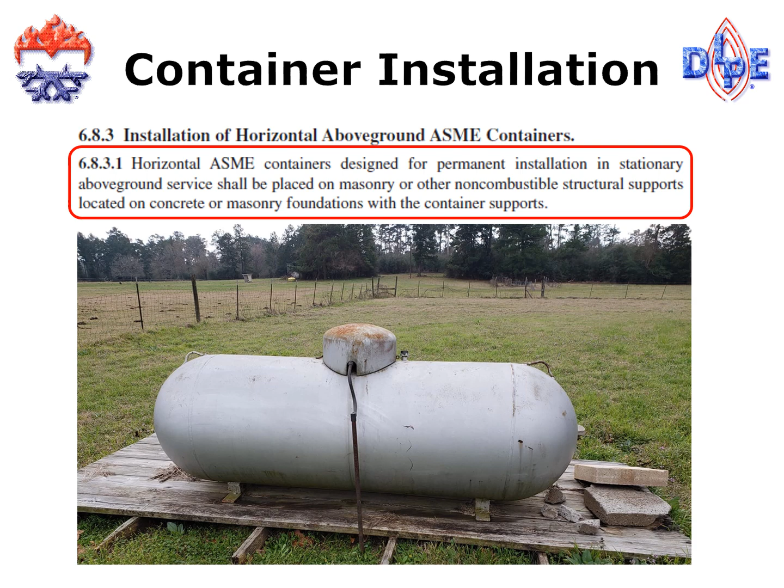Are you setting any containers not connected for use properly? If not, refer to section 6.3 in NFPA 58 for more details on how to properly and safely leave any containers not connected for use, whether it's at a job site or elsewhere.

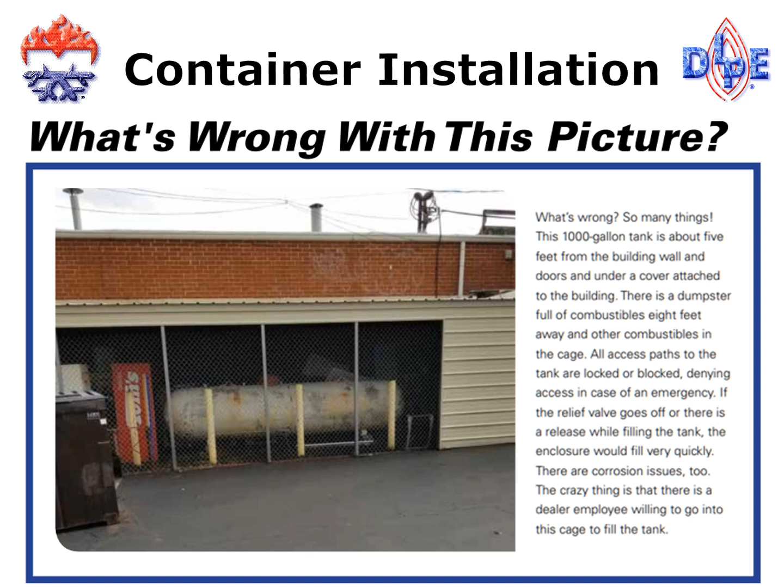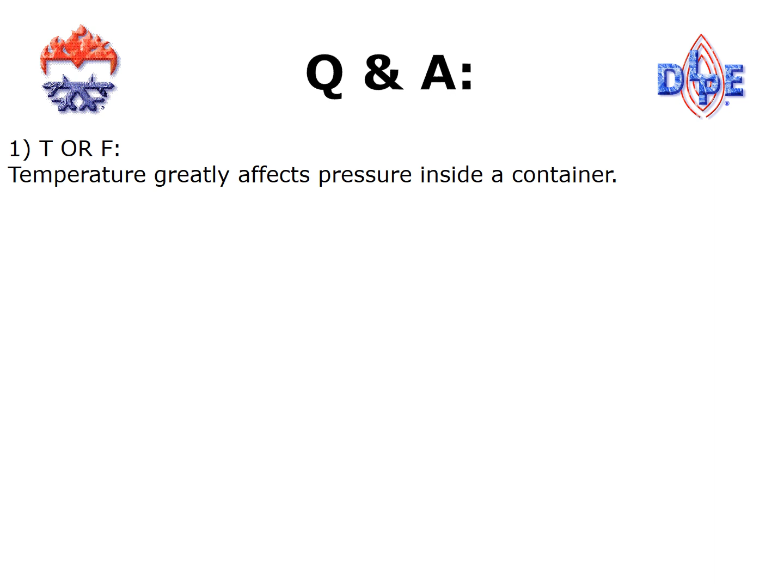Okay, now it's time for some Q&A. True or false? Temperature greatly affects pressure inside a container. The answer is true. Number 2, proper purging and air removal allows containers to fill blank. The answer is faster. True or false? Methanol should only be added in northern states.

The answer is false. Number 4, vaporization rates are blank at 20 degrees Fahrenheit than at 75 degrees Fahrenheit. The answer is lower. Number 5, true or false? In NFPA 58, containers may be set directly on the soil. The answer is false.